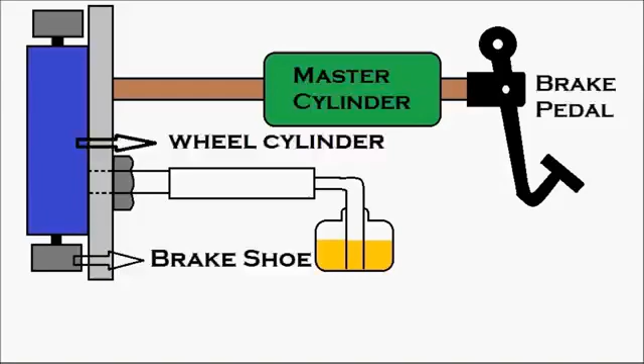First, let's identify the components. That's the brake pedal. Then we have the master cylinder in green, and the wheel cylinder in blue. There come our brake shoes—we have two brake shoes on the top and bottom of the wheel cylinder. Then the bleed valve, and a hose for brake bleeding, and a jar for brake oil bleeding.

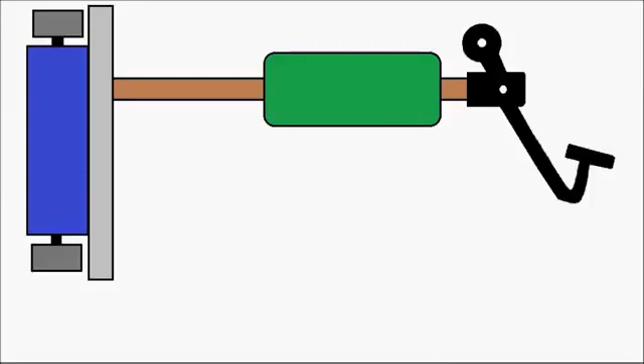First, we'll see the basics of the working of the hydraulic brake, and then we'll see how the brake bleeding procedure is done.

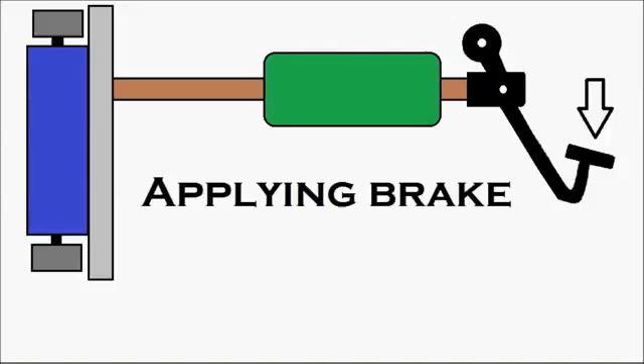So first let's apply the brake. Stepping on the brake pedal, the pedal moves and pressurizes the fluid in the master cylinder, which is in green. The oil gets pressurized inside and it moves.

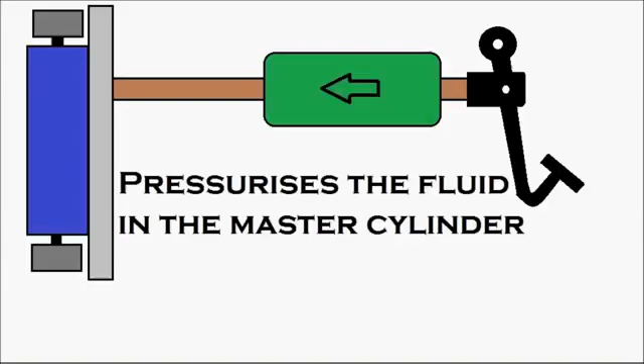The pressured oil enters the wheel cylinder, which is in blue. This pressure energizes the brake pistons, which are in yellow—you can see them getting energized because of the pressure.

The brake piston moves and pressurizes the brake shoes. The brake pistons move against the brake shoes, causing the brake shoes to move. You can see the brake shoes moving, and the brake is getting applied. So the movement of the brake shoes results in the brake being applied.

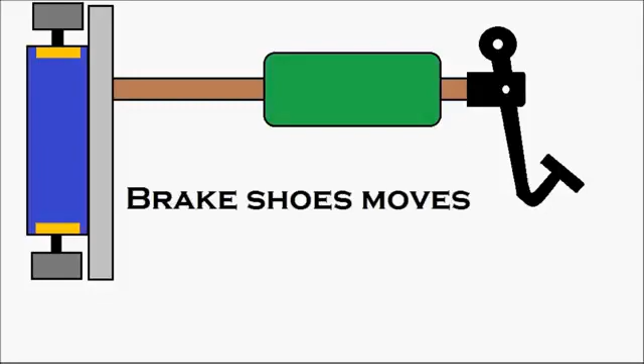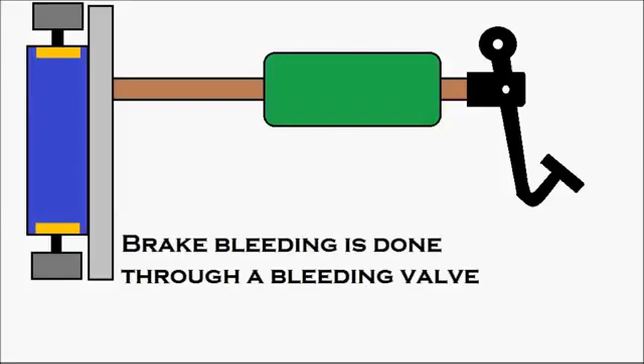How is bleeding of a hydraulic brake done? Let's see the apparatus required. The brake bleeding is done through a bleeding valve. That is the bleeding valve which you are looking at right now.

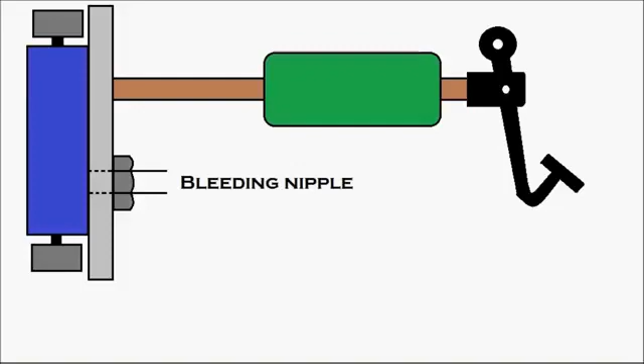There is a bleeding nipple onto it—we've made it bigger so you can identify it. A pipe is connected to the nipple and dipped into a jar with brake fluid like this. So this is the apparatus required for the brake bleeding.

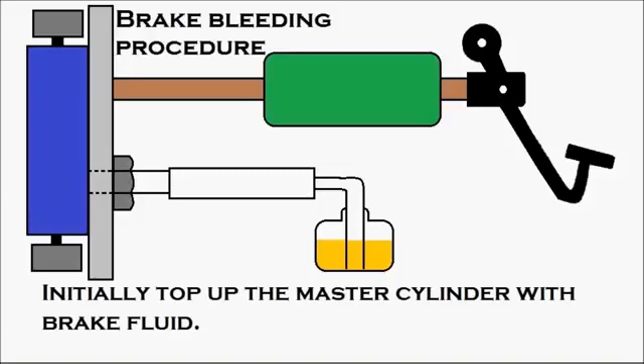Now, the brake bleeding procedure. Initially, top up the master cylinder, which is in green, with brake fluid. Sufficient brake fluid should be available inside the master cylinder.

The brake is applied by keeping the bleed valve closed. This is the bleed valve—it is in closed condition. Normally it will be closed, so keep it in the closed condition.

Two people are required for the brake bleeding process: one inside the cabin, the driver's cabin, to apply the brake pedal, and the other person down the vehicle to open and close the bleed valve.

Now the person inside the cabin is pressing the brake pedal. You can see the pedal getting pressed, the pressure inside the master cylinder increases, and the pressured oil moves into the wheel cylinder—you can see the pressure increases there.

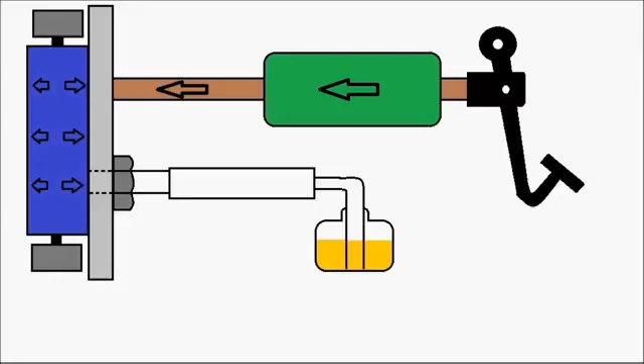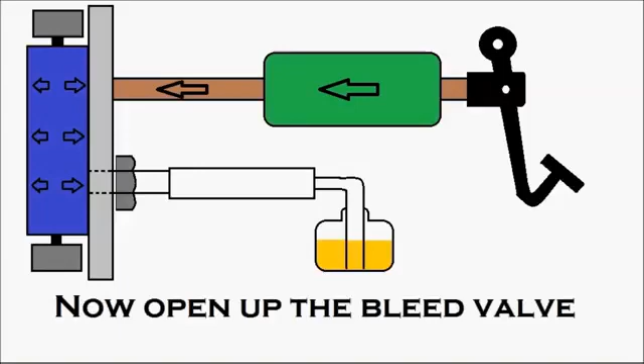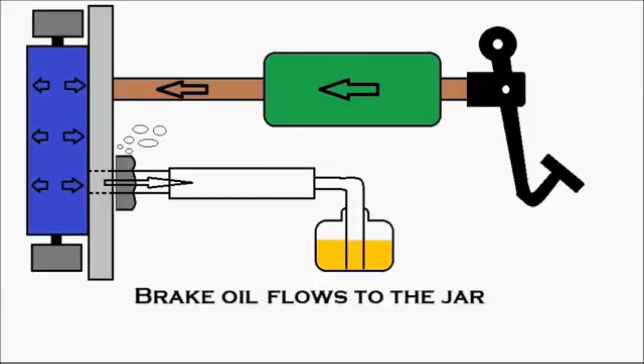Now we open up the bleed valve. The person down the vehicle opens the bleed valve—you can see it getting opened, and the air escapes out with a little amount of brake oil. The air is escaping out, and the brake oil flows towards the jar like this.

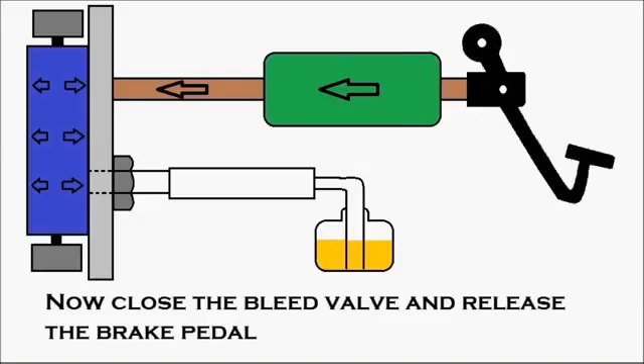Now close the bleed valve and release the brake pedal. First you close the bleed valve—that's the first thing to be done. As the valve is closed, the person signals the one inside the cabin to release the brake pedal. Then he releases it—the brake pedal has been released.

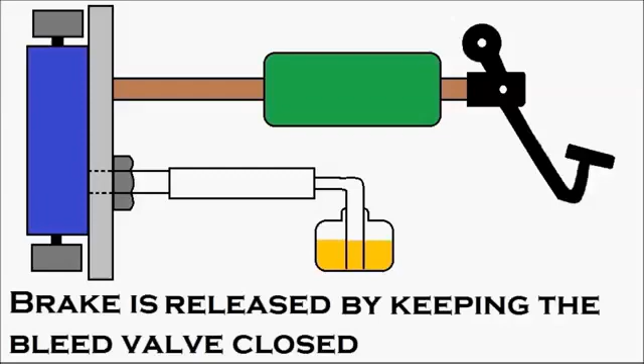So it is very clear that the brake is applied by keeping the bleed valve closed, and at the same time, the brake is released while keeping the bleed valve closed, as shown in the animation. The importance is that the brake pedal should only be released with the bleed valve closed, or else it will suck air from the atmosphere into the wheel cylinder.

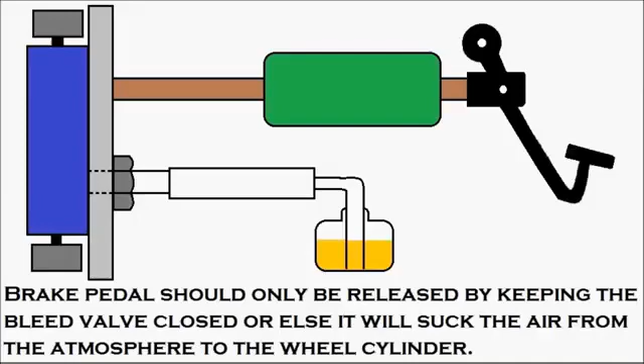So the procedure is very simple: first press the brake pedal, slowly open the bleed valve so the air can escape, then close the bleed valve and release the brake pedal again. This process of bleeding is continued till no more air bubbles are seen.

You have to understand why brake bleeding has to be done. If your hydraulic brake is not efficient enough, you need to check whether air has entered the system—the air needs to be bled out.

The hydraulic brake system consists of hydraulic oil, and this oil is incompressible. According to Pascal's law, when pressure is applied on a confined liquid, the pressure is distributed in every direction with equal amount. Since the brake unit is a closed unit with hydraulic oil, Pascal's law applies here.

But gradually air enters into the system, and air is compressible. So when we press the brake pedal, the air gets compressed inside the system, and the efficiency of the brake is lost.

To avoid this, brake bleeding has to be done occasionally by opening the bleed valve and following the procedure we have shown you through the animation.

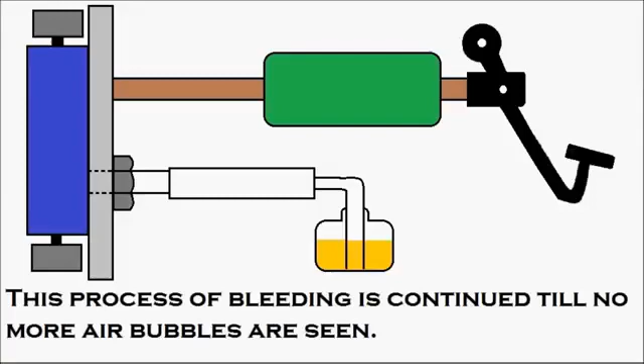I believe this was useful to you.